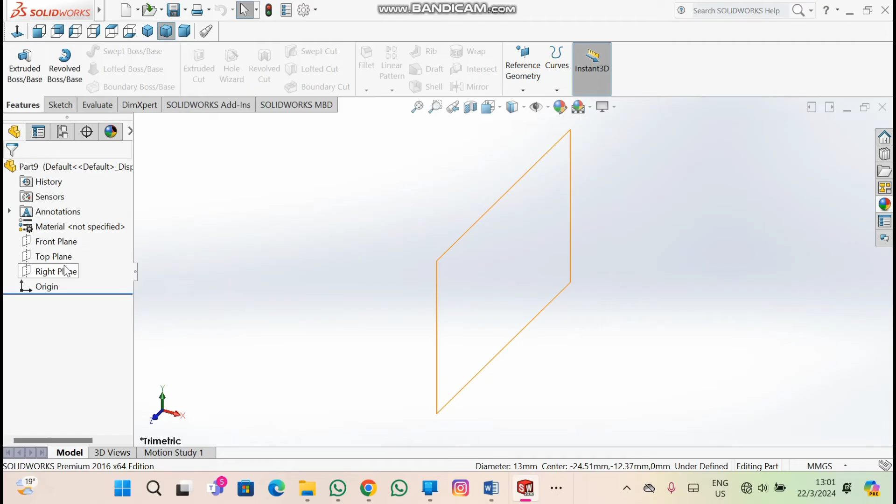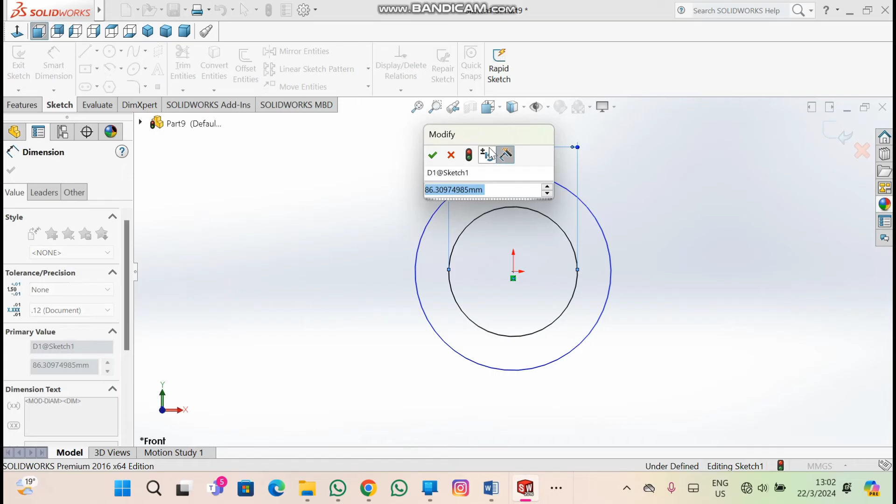On the wheel, first let me select the right plane, or the front plane, just cool. I'm going to first draw those two bigger circles. So these are the two circles which I'm going to draw. After that, I'm going to go to Smart Dimension. I need this to be 96. Click OK. This is the one I selected for 96.

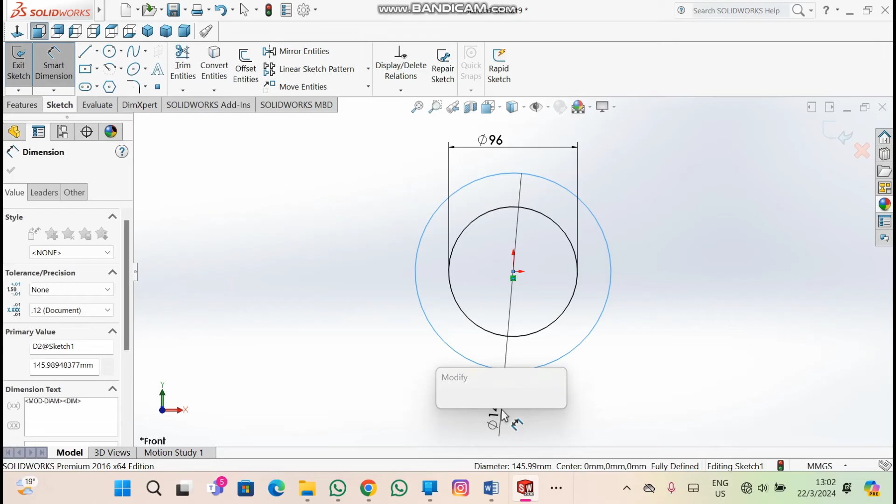So I'm going to go to this one. First let me escape here. Going to go to this one. I need this one to be 90. Click enter. Okay, go to features.

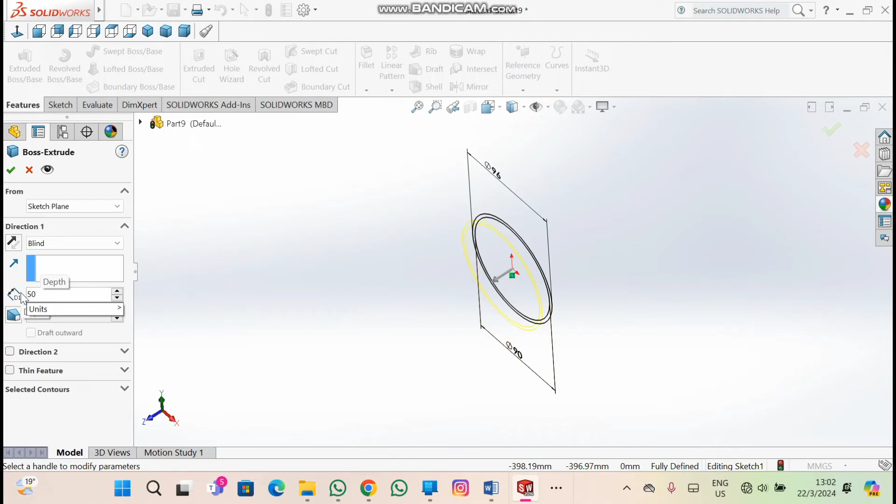Need to extrude. I'm going to choose 25 on each side. Okay, or let me just choose 50. There's something that I want to show you. Choose 50 and click OK.

Okay, so now let me go to my assembled part. As you can see, we have some two circles here which are at the middle. So let's just go to our SolidWorks. Right here, this is our wheel.

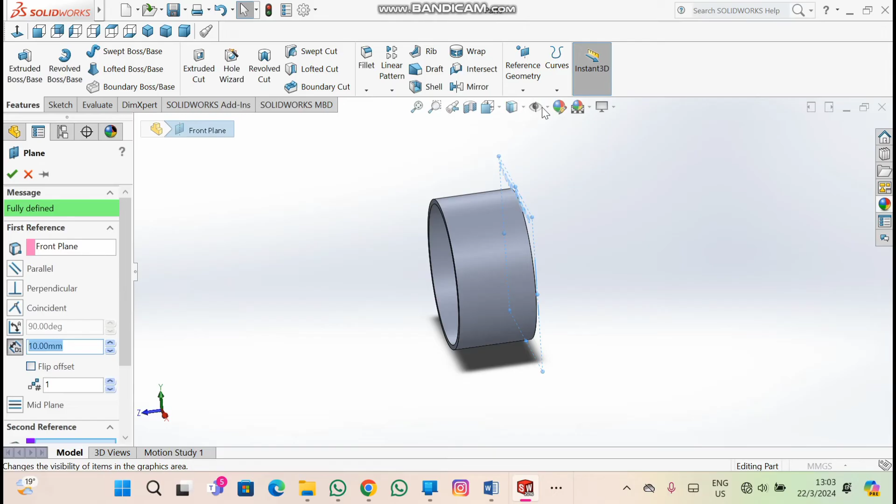Now we need to draw some two circles. If you select the front plane, if you look here, this plane is at the edge and we need it to be at the center. So if you go to features, go to reference geometry, then plane. We need our plane to be at the center, so we're going to choose 25 right here and click enter.

Okay, and now we can add those two circles. Come to sketch. So we need two circles here, and we need the other one right here. Okay, click OK, Smart Dimension.

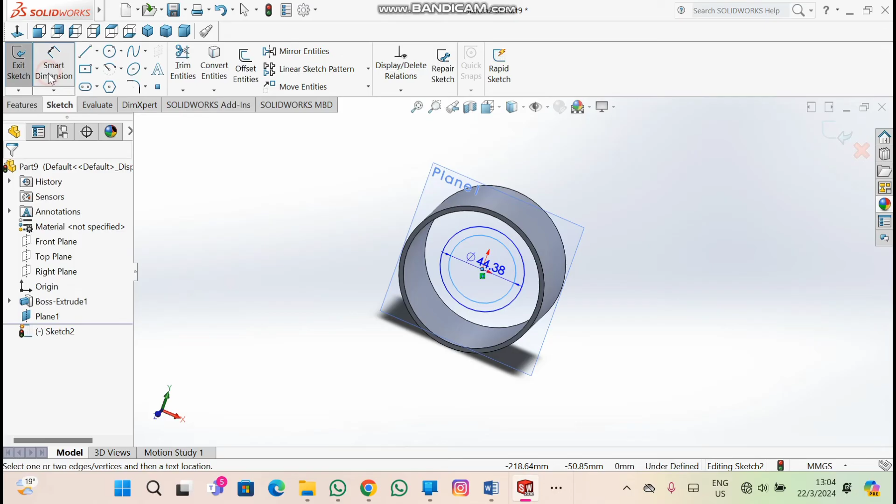So this one, I need it to have 36. And this one, I need it to have 24.

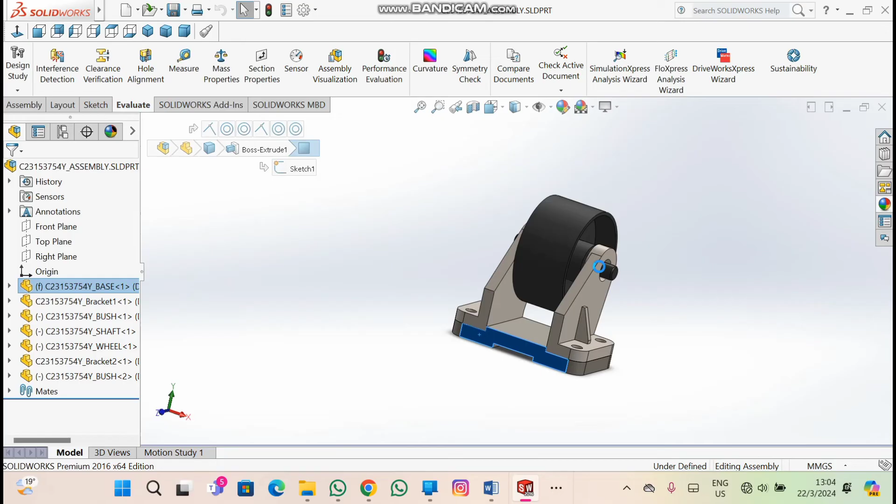Okay, now it's time to extrude. Remember, we said at the middle. So if we open our assembly, you see that those two circles are at the middle. So what we're going to do is that on both sides.

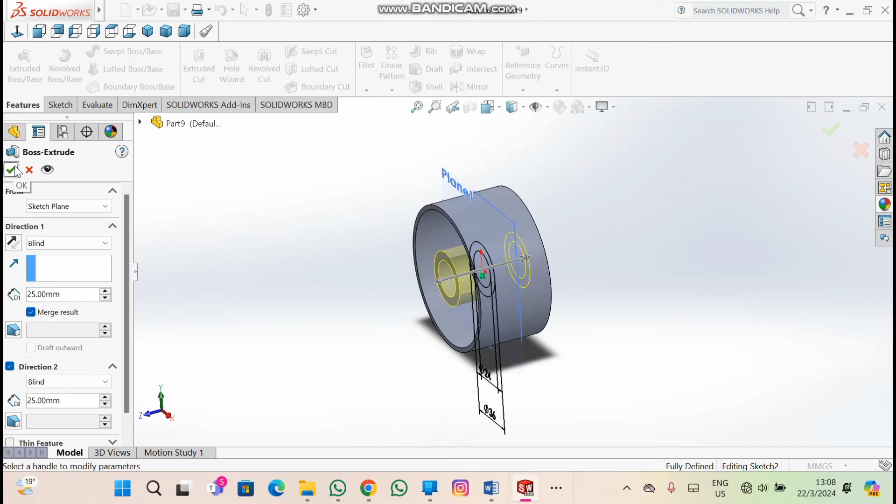So on our extrude, it's going to be a little different right here. Go to features, extruded boss base. We need to extrude 25 on each side, 25 here, and on direction 2, we need 25 again. Click enter, and this is what we have.

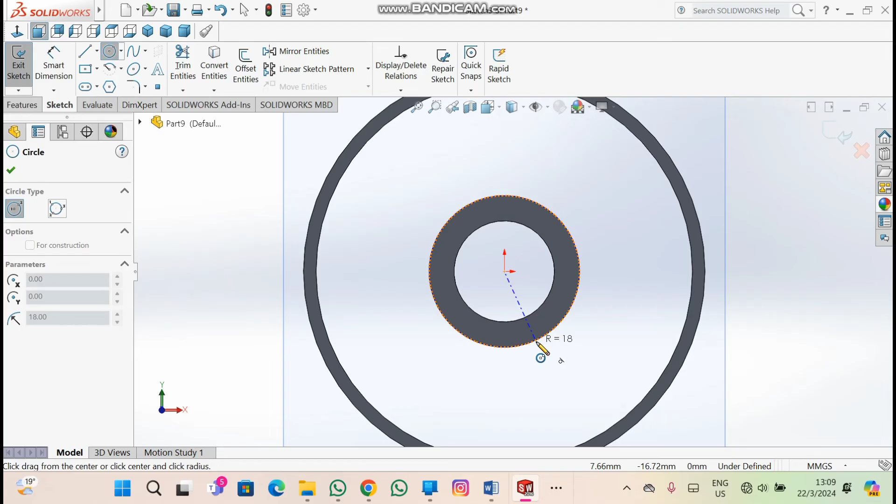Okay, so now go to the sketch. Let's go to the normal. We need to draw other two circles again. Come here, and we need to draw a circle. So the first one is going to have a radius of 18, and the second is going to have a radius of 45. Click OK and go to features.

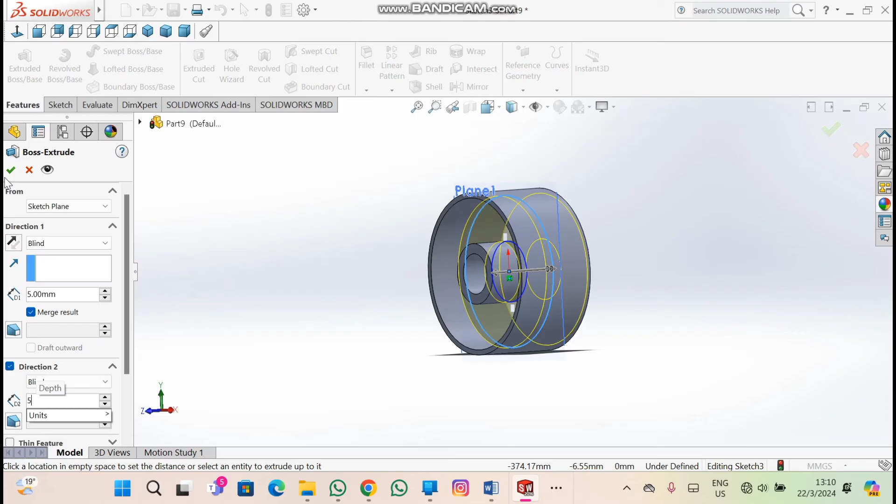We need to extrude that. So on both sides, I'm going to choose 5 here. On direction number 2, I'm going to choose 5 again so that it will have a thickness of 10.

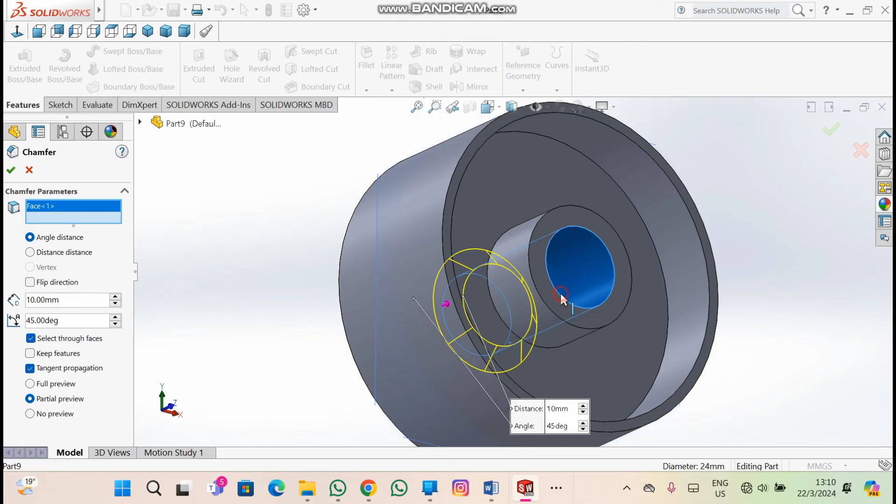And this is my wheel. Now what I need to do is add a chamfer here. Right here, I'm going to add the chamfer. And right here, I'm going to add the chamfer. Okay, let me see how it looks. Okay, so it's cool.

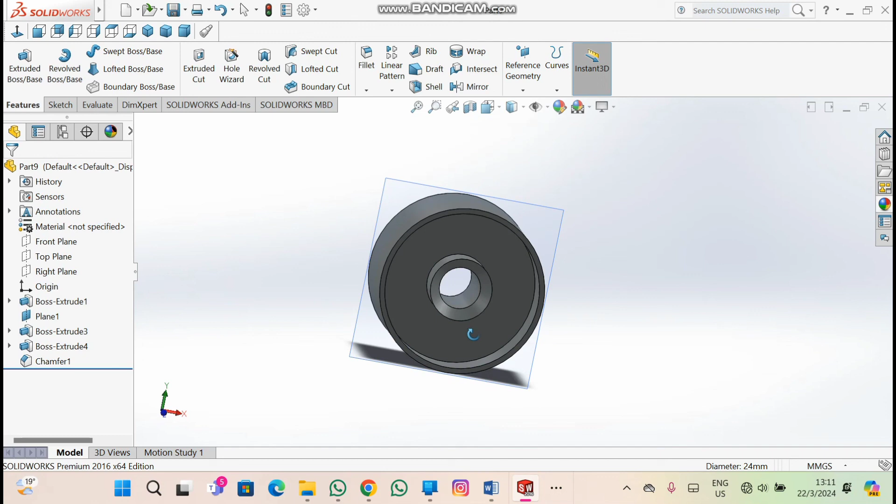So this is my wheel, and you can change its material. This one. So as you can see, it's now our wheel. And I'm going to click on save. Okay, so save as copy, continue. So click the name.